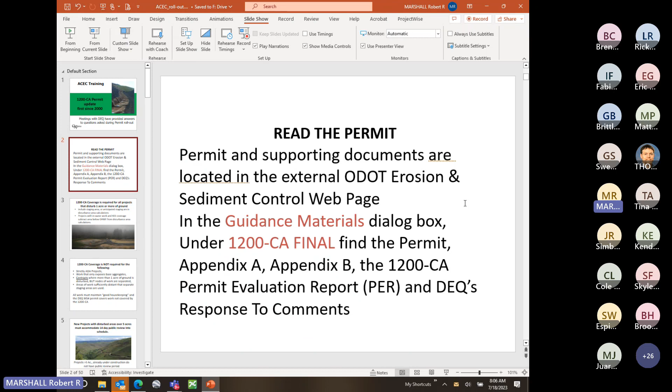The 1200 CA permit evaluation report is a guidance document for DEQ inspectors so that the guidance for inspecting projects will be consistent over time and with different inspectors. This dialog box also includes DEQ's response to comments, as there were many comments and frequently asked questions during the finalization of the permit language. So look on the ODOT Erosion and Sediment Control webpage to find this information and read the permit.

The 1200 CA coverage is required for all projects that disturb 1 acre or more of ground. This includes the staging area or anticipated staging area in the disturbance area calculations. For projects with in-water work that have DEQ's 401 coverage, subtract the area below ordinary high water from the disturbance area calculations for the 1200 CA. Stuff that's covered in the 401 is already covered, so there's no double dipping on the permits there.

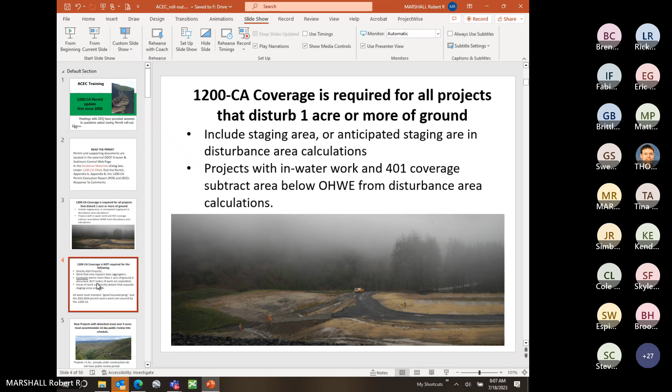The 1200 CA coverage is not required for the following: projects that are strictly ADA projects, so ramp and sidewalk projects that are exclusively ramp and sidewalk projects are excluded. Work that only exposes base aggregate is also excluded. The disturbance that the 1200 CA is concerned with is disturbance of soil, so base aggregate exposure does not trigger the 1200 CA coverage.

Contracts where more than 1 acre of ground is disturbed, but the nodes of work are separated, are also excluded. For example, we might have signage projects that, as an aggregate, have more than 1 acre of ground disturbed, but the 1 acre could be spread over several miles, so each node of work would be less than 1 acre, and that will not require the 1200 CA coverage. Another way of looking at that is if the areas of work are sufficiently distant that separate staging areas are used, that would be an indicator that the 1200 CA is not required.

All work on all our projects must maintain good housekeeping, and DEQ has an MS4 permit that covers work that is not covered by the 1200 CA. So be aware that if the project's not covered by the CA, you still need to work clean and responsibly.

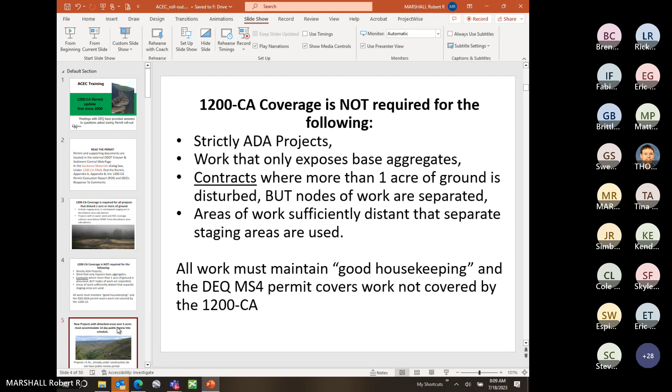New projects with disturbed areas over 5 acres must accommodate a 14-day public review period into the schedule.

Just to let you know, I had this computer plugged into the wrong thing. Hey man, you're on mute. There you go. Humans, what are you going to do?

Anyway, new projects that disturb more than 5 acres must accommodate the 14-day public review period into the schedule. Projects over 5 acres that are already under construction did not have a public review period.

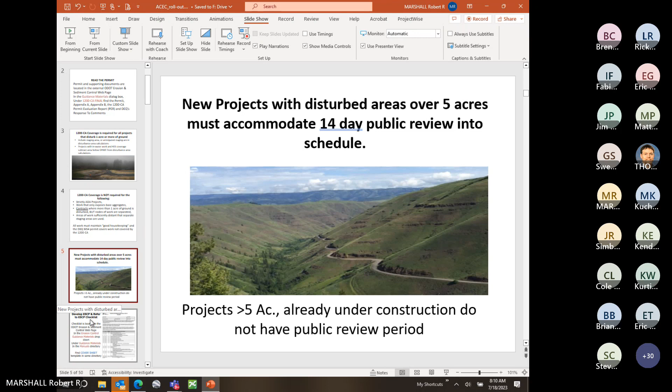We need to develop the ESCP, the Erosion and Sediment Control Plan, that is compliant with the Department of Environmental Quality's requirements. We've updated our erosion and sediment control checklist to help provide guidance in that regard. The checklist is located on the ODOT Erosion and Sediment Control webpage in the Erosion Control Guidance Materials dropdown, and under Guidance Materials in the Manuals directory.

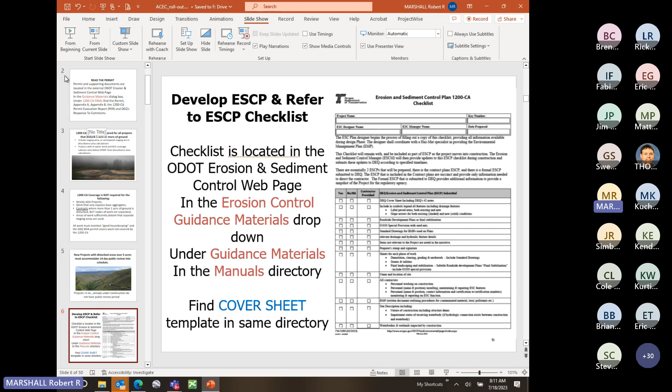You can find the checklist there, and you can also find the cover sheet template in the same directory. The cover sheet is a MicroStation file, and it is built in 3 models for 3 separate sheets.

The first sheet will provide direction for the designer, the erosion and sediment control plan designer, to infill information that should be available during the design process. The second sheet of the cover sheet provides the DEQ required notes. The third sheet provides blank spaces and guidance for the contractor to provide information that would not be known during the design process.

Designers infill the cover sheet to the fullest extent possible. The contractor must supply the remaining information after the bid is awarded.

During design, you can duplicate the project site and vicinity maps, infill the work phase BMP matrix. It's in the upper right-hand corner of the first sheet, and provide the site and project information in a simple narrative. Be aware that ProjectWise has a cover sheet directory, so once the cover sheet is edited, it can be loaded into ProjectWise.

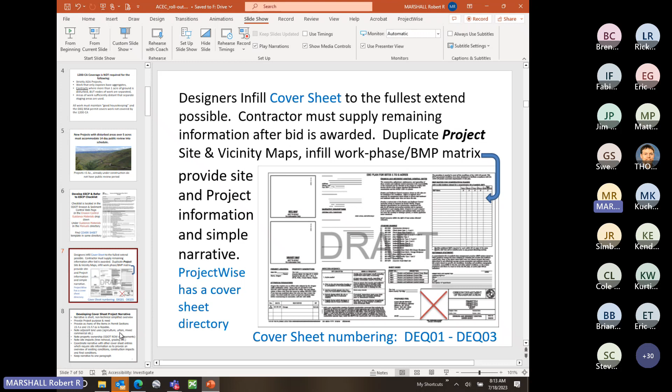In developing the cover sheet narrative, the narrative is a short, non-technical, simplified overview of the project. In the narrative, provide the purpose and need, and provide as many of the items in the permit sections as feasible.

Sections 15.4.e and 15.4.f as feasible. Some of the listed items will not apply to our project.

Note the adjacent land uses—they could be agricultural, rural, urban, or mixed commercial, etc. Note the property ownership; this will usually be on ODOT right-of-way with easements. Note the site impacts, such as tree removal or grading. And coordinate the narrative with other cover sheet entries which require site information.

Provide an overview of the existing conditions, the construction impacts, and the final conditions. Keep the narrative simple and try to keep it to one paragraph.

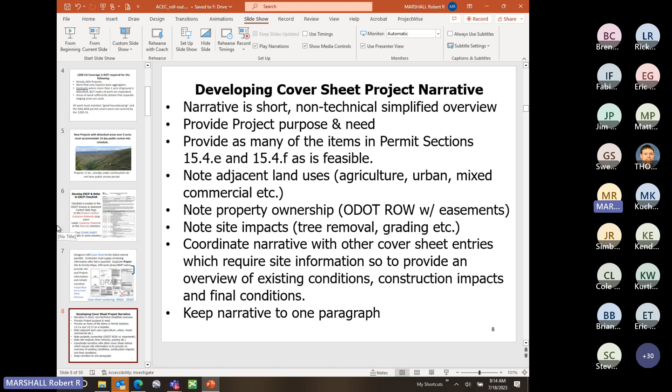Provide in the erosion and sediment control plan submittal, the cover sheet. Cover sheet 3 provides blank lines for the contractor to list potentially polluting materials and activities, and lists water bodies within one mile of the project and their 303 impairment status.

Anticipate the non-stormwater discharge, such as fire hydrant flushing or irrigation system flushing. Note the buffer zones if the project is adjacent to water. If treatment is used to neutralize contaminated materials, get approval from DEQ prior to use of that system.

We will need to provide an EMP if contaminants are known to be on the project site. You need to provide the standard drawings referenced in the plan sheets, the erosion and sediment control plan sheets. Provide the 280 standard specification and the special provision.

And then because DEQ wants to know what the seed mix is for final stabilization, provide the 1030 special provision, so as to provide the seeding.

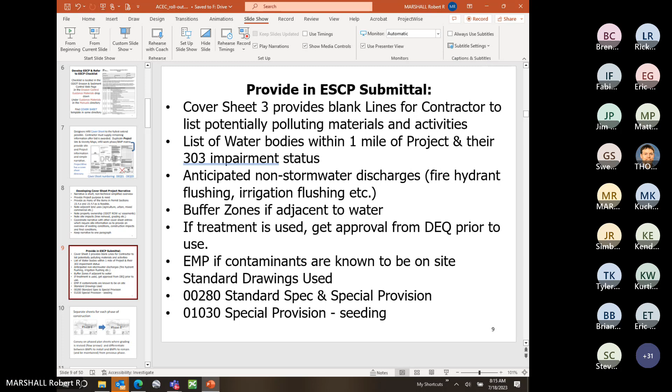The erosion and sediment control plans will now need to be developed to represent each phase of construction. Convey on the phased plan sheets where grading is revised; flow arrows can provide that information.

Differentiate between BMPs to install and BMPs to remain in place from the previous phase. Showing BMPs that remain from the previous phase can be done by shading or graying them out, and not drawing attention to them with the keynotes.

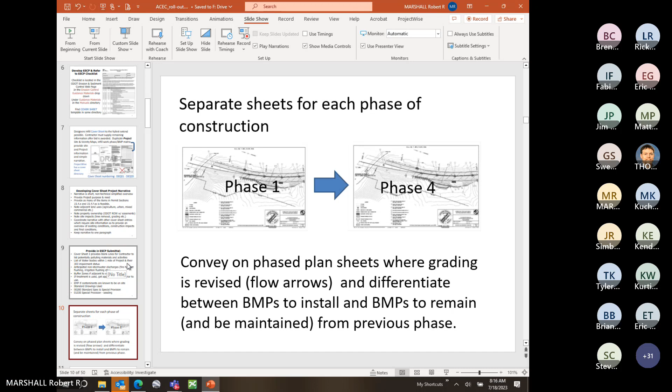So develop the erosion and sediment control plans aligned with DEQ's requirements. Phase plans must have labels identifying the phases of work as described in permit section 15.3.

DEQ's identified phases of work are the following: A is demolition, clearing, grading, and earthwork; B is streets and utilities; C is vertical construction; and D is final landscaping and site stabilization.

DEQ's phases describe land development, not linear construction. ODOT's phases of work follow ground disturbance. So to stay aligned with DEQ's requirements but represent ODOT's phasing of work, some DEQ labels may not apply.

For example, when a DEQ phase does not apply, such as no vertical construction, note that in the narrative. Most ODOT projects combine phases A and B into a phase of demolition, earthwork, and streets and utilities, which may be conducted in different stages as work moves around the project.

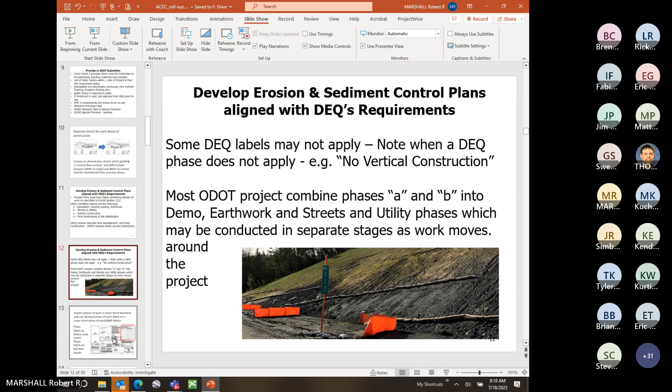So explain the phases of work in the cover sheet narrative and use identical phase of work labels as in the cover sheet phase of work BMP matrix. Phase labels on the matrix must match the phase labels in the erosion and sediment control plan sheets.

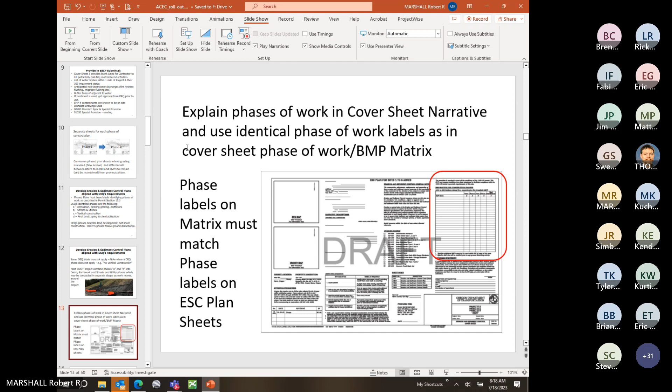Develop the erosion and sediment control plans aligned with DEQ requirements. In the final phase, show seeding, mulching, and all final site stabilization. It's worth recalling that section 280.70 in the specifications requires removal of all temporary BMPs.

But in our final phase plan sheets, for example if we've got straw wattles in the final phase, we are not showing a final phase with all those structural BMPs removed. They will be removed as required by the contract, but it's been directed by the state engineer that we're not developing a special sheet set just for a hatching that represents seeding.

The FA series, which is roadside development, when used—when we've got a planting plan for the project—should have the final stabilization label added and included on the sheet.

Hey, Bob. Hey. There's a question in the chat: can you confirm separate plans are required for the DEQ phases, not the traffic control / construction stages and phases?

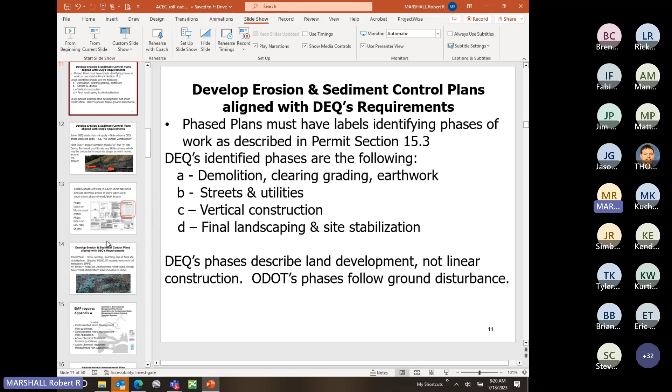So the traffic control plans can provide a reference as to how disturbance is actually moving around the project.

The labels can still correlate with the DEQ labels and may be combined, as I noted, that earthwork and streets and utilities could be combined into one phase, and those phases can follow the phasing of work as identified in the traffic control plans. But the traffic control plans are not gospel as to how the work is moving around on the project site.

So you have to talk with the project leader and just be aware of how the project is sequenced.

Ian, and I appreciate—go ahead. Ian, did that answer your question?

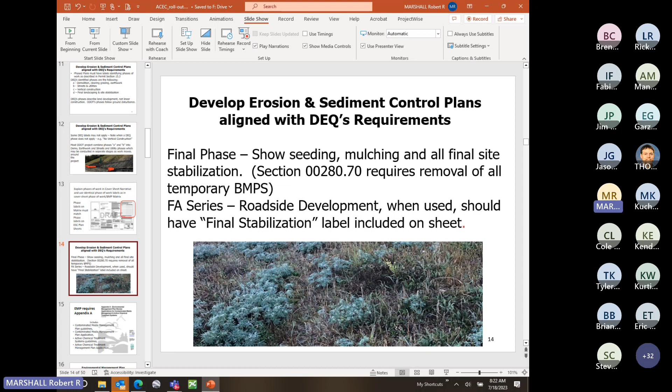So anyway, the final phase could be just the final phase of erosion and sediment control with seeding, or the final phase might be the introduction of the FA series, which is a planting plan to the ESCP. So the environmental...

When contaminants are known to be on site, designers will be working with ODOT hazmat, and ODOT hazmat can identify the type, depth, and location of contaminants on the project site. When contaminants are known or found during construction, the contractor is responsible for developing the environmental management plan, the method for treatment, or location of the approved disposal site. These are means and methods owned by the contractor. All work associated with contaminated materials shall comply with Section 290, and work must immediately stop in locations of found contaminants.

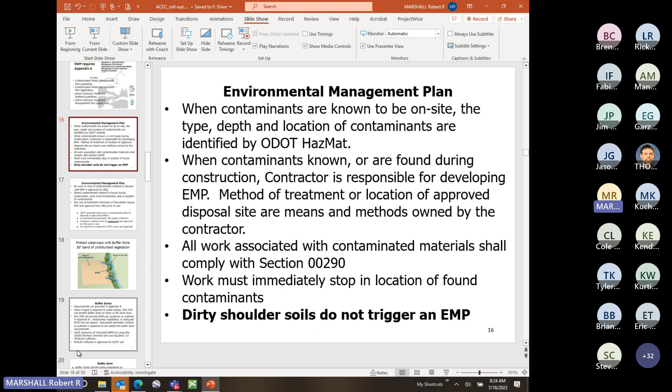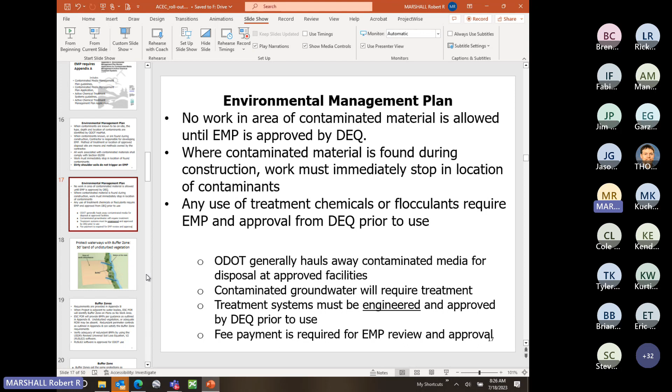ODOT generally hauls away contaminated media for disposal at approved facilities. Contaminated groundwater will require treatment. Treatment systems must be engineered and approved by DEQ prior to use, and there is a fee payment required for the EMP review and approval. Be aware that the fee payment also includes a payment service fee, so that's going to be about $970 for an EMP approval, and that is paid through the YDO electronic portal.

Another new requirement is that buffer zones are now required where work is adjacent to waters of the state. The buffer zone is required to be 50 feet, and where 50 feet of undisturbed vegetation is not available, there is guidance in Appendix B, which provides guidance as to BMPs that can be used to provide equivalent protection as a buffer zone. Again, requirements are provided in Appendix B.

When a project is adjacent to water bodies, the erosion and sediment control professional of record will identify that buffer zone on plans as a no-work area. The ESC professional of record will provide BMPs per guidance as outlined in Appendix B. Undisturbed vegetation or adequate right-of-way may be absent in this buffer zone. Redundant perimeter controls as outlined in Appendix B can satisfy the buffer zone requirements.

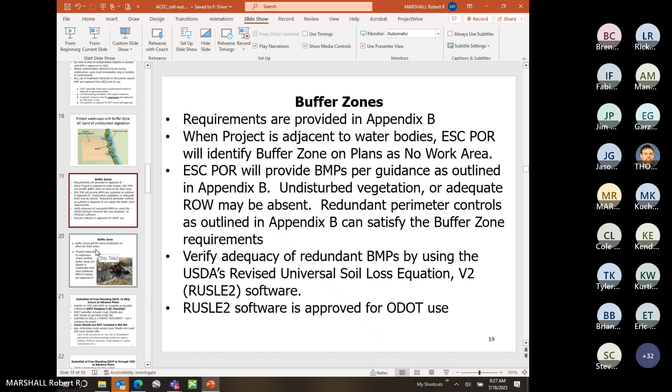DEQ wants us to verify the adequacy of the redundant BMPs by using the USDA's Revised Universal Soil Loss Equation version 2 software, that's the RUSLE2 software. The RUSLE2 software is approved and vetted by ODOT for use. So buffer zones get the same protection as other no-work areas, and projects adjacent to waterways where existing buffer zones are absent or inadequate shall have additional BMPs in the design per Appendix B.

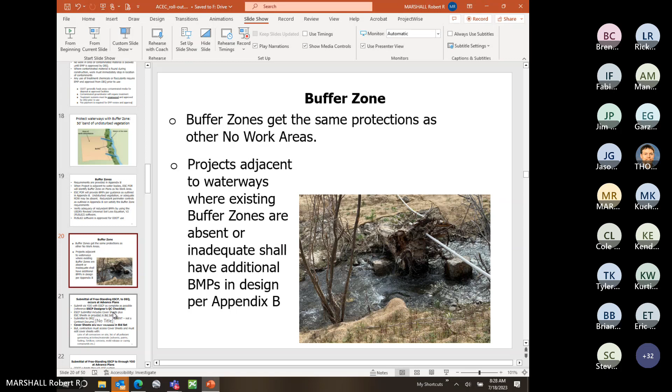Submittal of the freestanding erosion and sediment control plan to DEQ occurs at advanced plans. This submittal will occur via YDO, that's DEQ's Your DEQ Online electronic portal. So submit via YDO with the erosion and sediment control plan as complete as possible, and after using the ESCP designer's quality control checklist. The erosion and sediment control plan submittal to DEQ includes the cover sheets plus the erosion and sediment control sheets as provided in the bid set.

Submittal to DEQ is a permit document, not a contract document. Cover sheets are not included in the bid set, but contractors must be able to access the cover sheet and must edit the cover sheet with the list of all contractors on site, the list of all pollutant generating activities and materials, such as paint, solvents, fuel, fertilizer, concrete, mold release, or curing compounds, etc.

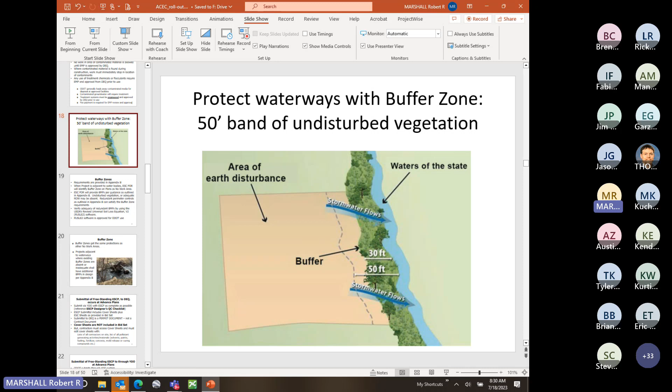Back to submitting the freestanding ESCP. This goes through YDO and advanced plans. ODOT will submit this through the YDO system. Contractors and design consultants should sign up to the YDO as consultants, approved by an ODOT RO, so ODOT needs to bless the consultants in the YDO system. YDO consultants can access documents in the system, but not submit to the system. Submittal to the system infers a signature as an ODOT representative.

Only YDO responsible officials, those would be ROs, can submit documents. Professionals of record, RECs, regional environmental coordinators, and resident engineers and environmental discipline leaders should sign on to YDO as ROs. Those would all be ODOT positions. ROs can be responsible officials for multiple projects.

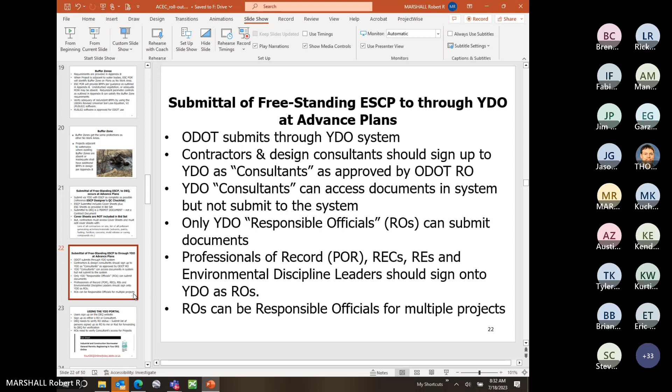When using the YDO portal, users sign in on the DEQ website, either as an RO or a consultant. DEQ needs to verify the RO status, so ODOT needs to submit a list of persons signed up as RO to me or Rod for forwarding. Then ROs need to verify consultant access for projects.

At the bottom of this page, I grabbed a snippet of the DEQ website, and you can see the DEQ YDO online web address. Go on there—there is a tutorial, a video you can look at to become acquainted with the YDO portal.

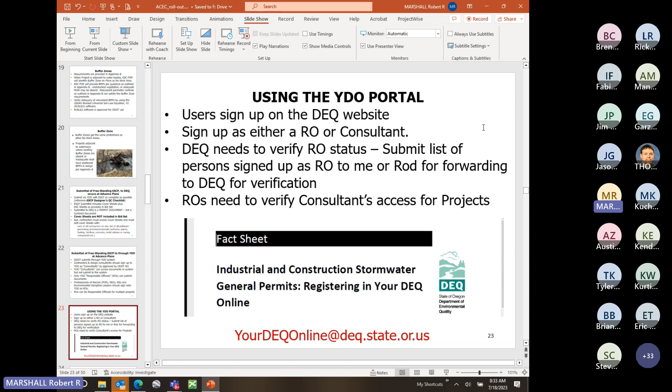In using the YDO portal, responsible officials start a new submittal from the left side of the dashboard. There needs to be a naming convention with the first word as ODOT, then the project name as provided in the project title block. When you're using the YDO and downloading stuff, that's a simple drag and drop.

The required submittals for the erosion and sediment control plan to DEQ are the initial ESCP, the environmental management plan when contaminants are known or found on site, revisions of the ESCP, and corrective action reports. Monitoring reports are not a required submittal unless asked for. On a project site, it's important to have the monitoring reports available and in chronological order for DEQ when asked.

The 14-day public review period: ODOT submits to DEQ at advanced plans. The 14-day review period begins on the day that DEQ posts the project for review, not on the day ODOT submits the project to DEQ. DEQ says there may be a few days between the submittal and posting.

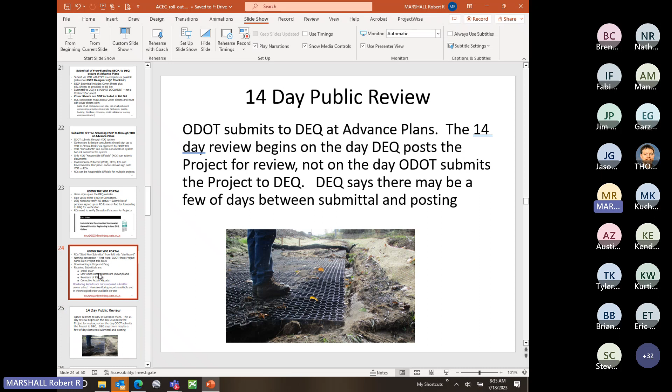I want to go back for a second. Be aware that the initial submittal of the ESCP is to start the DEQ project file for this project. ODOT's 1200-CA permit is in good standing and in hand, and the initial submittal of the ESCP to DEQ is not required to initiate construction. So we've got the permit in hand and construction can start, and that's not dependent on this initial submittal of the ESCP.

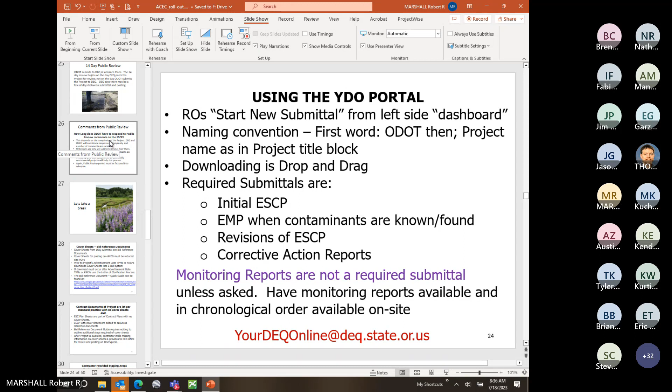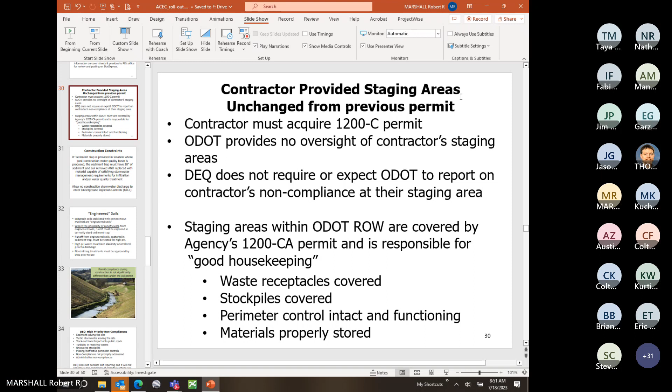Tina asked, does the first page of the erosion and sediment control plan include a legend, the standard drawing list, general notes, even though the cover sheet has that information? And that is yes. And then Brookley asks, even if a contractor's staging area is on private property and the contractor has a 1200C permit for that staging area, is it true that the staging area still needs to be counted when calculating the total project area of disturbance? And yes, it continues to be a requirement that DEQ has imposed.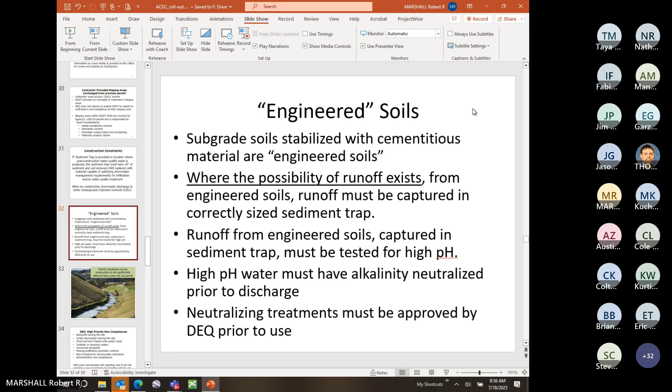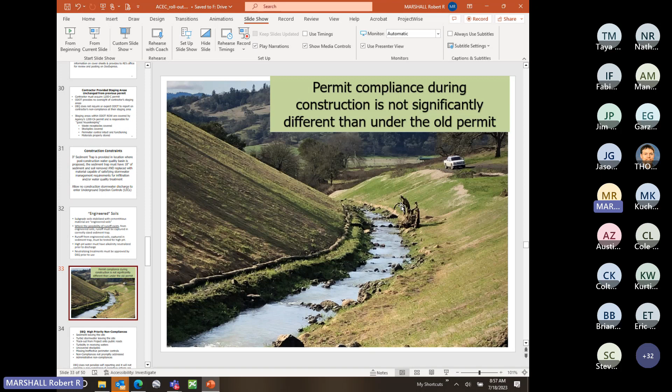Permit compliance during construction is not significantly different than it has been under the old permit. So if best practices are followed and BMPs are installed correctly and BMPs on the plans are all installed, it should not be a problem complying with the permit. So we can do this. I know that the new requirements on paper look daunting, but we can do this.

DEQ's high priority non-compliances are sediment leaving the project site, turbid stormwater leaving the site, track out from the project onto public roads, turbidity in receiving water, uncovered stockpiles, missing or ineffective perimeter controls, non-compliance not promptly addressed, and administrative non-compliance.

The missing or ineffective controls regards BMPs that are shown on the plan and not installed in the field. So it's important that BMPs that are shown on the plans be installed and installed properly. And then administrative non-compliances are always a concern. DEQ will not penalize self-reporting, and it will not penalize a non-compliance if corrective actions are prompt and thorough.

A request for clarification about the acronyms being used. Okay, a BMP is a best management practice. That would be any structural erosion and sediment control feature. For example, straw wattles, compost socks, inlet protection, and matting are all best management practices.

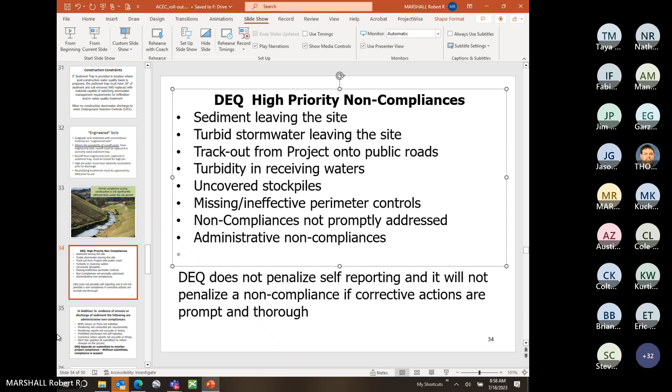In addition to evidence of erosion or discharge of sediment, the following are administrative non-compliances. BMPs shown on the plans are not installed. Monitoring not conducted per requirements. Monitoring reports not accurate or timely. Prohibited discharges not self-reported. Corrective action reports not accurate or timely. The erosion and sediment control plan not updated and submitted to reflect changes on the ground.

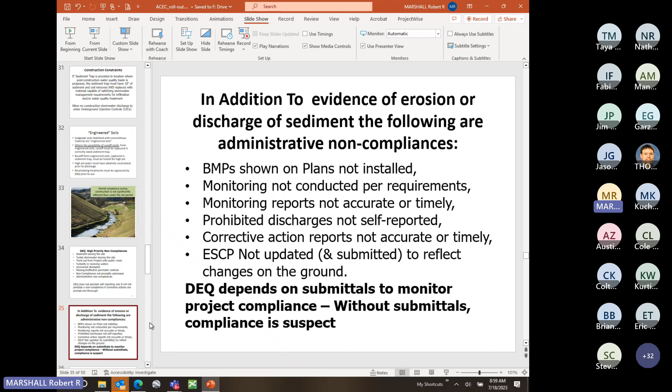DEQ depends on submittals to monitor project compliance. Without submittals, our compliance is suspect. So in addition to having features on the ground as they should be, all the paperwork also needs to be as it should be. So it is important to revise the erosion and sediment control plan to keep it representative of the site conditions, including when construction plans change, when site conditions change, or when BMPs change.

The erosion and sediment control manager provides the erosion and sediment control plan revisions to ODOT within 7 days of the field change for submittal to DEQ. The agency submits to DEQ within 30.

I took a picture of the... Hey, Taya. You're not on mute. Thank you. There you go. Humans.

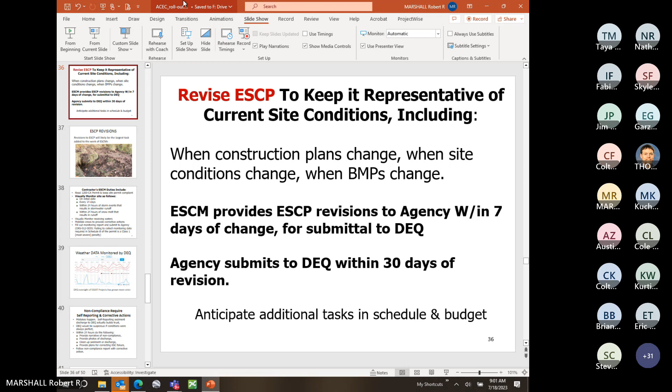So the ESCM provides the ESCP revisions to ODOT within 7 days of the field change for submittal to DEQ. Then ODOT submits to DEQ through the YDO portal within 30 days of the field revision. So anticipate additional tasks in the schedule and budget. ESCP revisions will likely be the largest task added to the work of ESCMs.

So during design and establishing the project cost estimate, consider that the ESCMs will have additional tasks that will add to the budget. These should be accounted for.

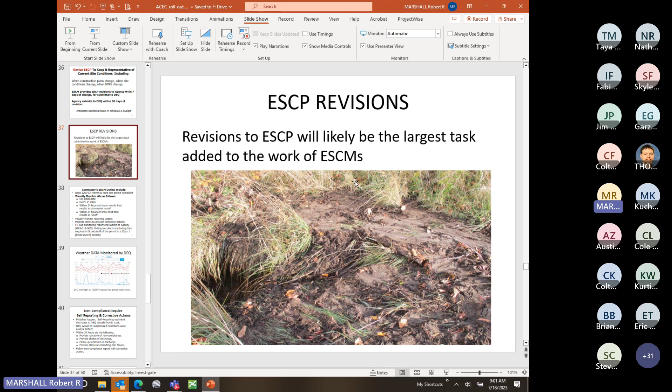The contractor's ESCM duties will include to read the 1200-CA permit and keep the project site permit compliant, to visually monitor the site as follows: on the initial date, every 14 days, within 24 hours of storm events that result in stormwater runoff, and within 24 hours of snow melt that results in runoff.

They need to visually monitor receiving waters, to mobilize crews to provide corrective actions, and to fill out the monitoring report and submit that to the agency. ORS 012-0055 is a statute that reads failing to collect monitoring data is a Class 1 penalty. So that is a severe penalty if the monitoring is not provided as required.

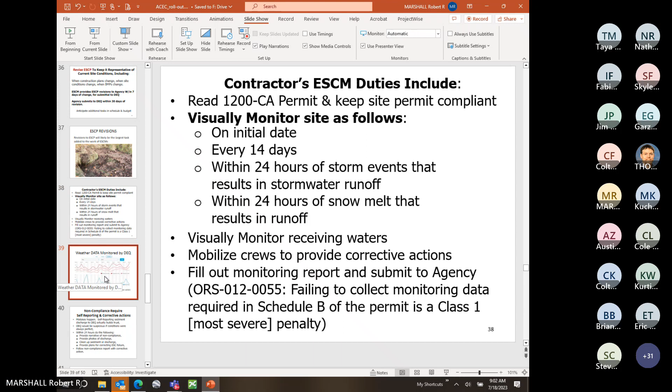As I noted, the monitoring reports are not a required submittal, but DEQ can ask for them at any time. And when asked and provided those monitoring reports, DEQ can kind of desk monitor whether they are accurately representing rainfall events. So again, accurate monitoring reports are important because DEQ can be looking over our shoulders.

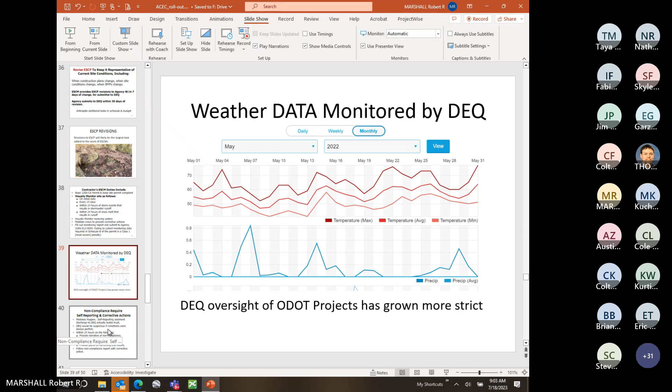Non-compliance requires self-reporting and corrective actions. Mistakes happen. Self-reporting a sediment discharge to DEQ will actually build trust. DEQ would be suspicious if conditions were always perfect.

So within 24 hours of a non-compliance, the following must be provided. Provide a narrative of the non-compliance, provide photos of the discharge, clean up the sediment or the discharge, and provide plans for correcting the erosion and sediment control failure. Follow the non-compliance report with corrective action.

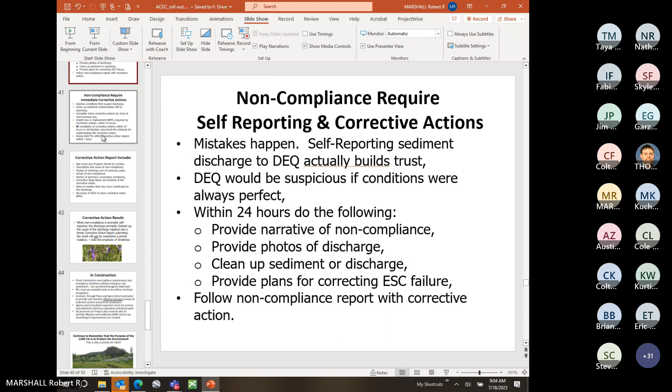Non-compliance requires immediate corrective actions. Address the conditions that caused the discharge, clean up the sediment left by the discharge, complete minor corrective actions by the close of the next business day. Install new or replacement BMPs required by the corrective actions within 24 hours.

If completion of corrective actions within 24 hours is not feasible, document and schedule for implementation the corrective actions, and then revise the ESCP to reflect corrective action repairs within 7 days. I know that a lot of the attendees to this presentation are design consultants, but we also have consultant inspectors. So these non-compliance issues that occur during construction are still relevant to this audience.

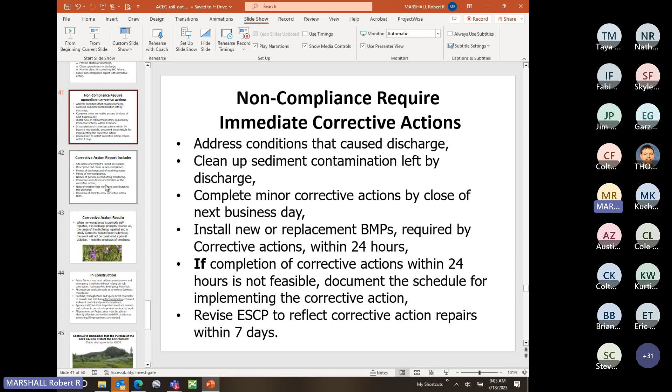The corrective action report includes the site name and the project's permit ID number, the description and the cause of the non-compliance, photos of the discharge and of receiving water, period of the non-compliance, the names of the persons conducting the monitoring, the corrective steps taken and the timeline of the corrective action, the note of the weather that may have contributed to the discharge, and revisions of the ESCP to show the corrective action BMPs.

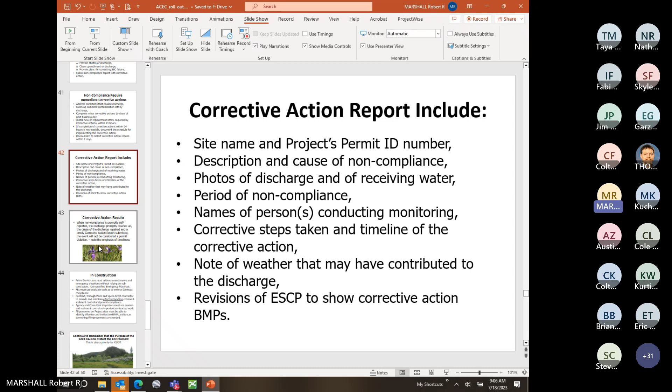So when a non-compliance is promptly self-reported, the discharge promptly cleaned up, the cause of the discharge repaired in a timely corrective action and a timely corrective action report submitted, the event will not be considered a permit violation. Note the emphasis on timeliness.

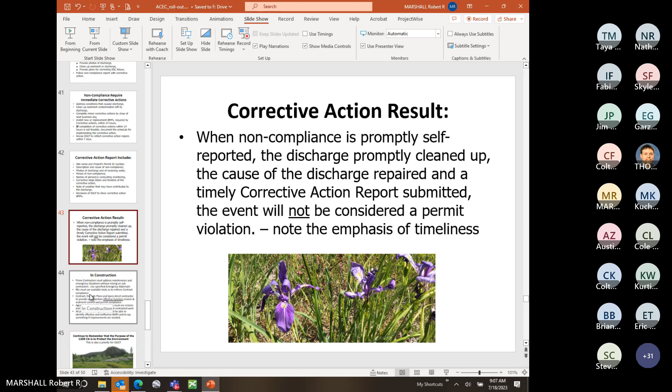So in construction, the prime contractors must address maintenance and emergency situations without relying on subcontractors. It is important that designers provide in the special provisions adequate emergency materials, and it is equally important that during construction the prime contractors use those emergency materials. I think it's relevant for this audience that the nature of emergency materials be identified, that these are products that could be stored on the project site and be readily deployed.

So something like a compost sock that needs to be field fabricated would require the mobilization and delivery of bulk materials, whereas compost socks that are pre-filled and on a pallet could be immediately deployed without mobilization of special equipment. So in design, make sure that you're specifying emergency materials that the prime contractor can quickly install.

Resident engineers must use available tools to enforce the contract compliance. Contract plans and specs direct the contractor to provide and maintain effective function of erosion and sediment control and permit compliance. Agency and consultant inspectors must see erosion and sediment control as important contracted work. This is work that's contracted and being paid for, so it's important that it is done. And all personnel on project sites must be able to identify effective and ineffective BMPs and to say something if improvements in the effective function are needed.

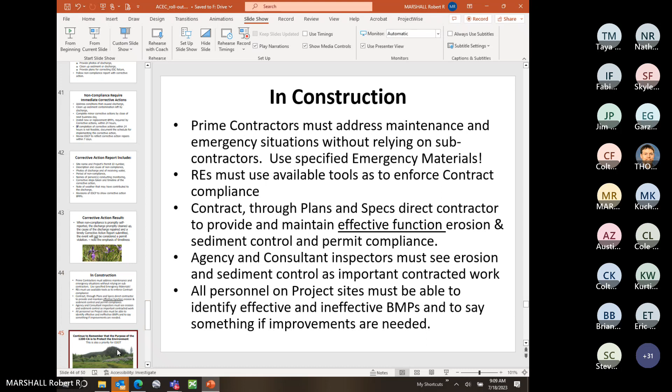Continue to remember that the purpose of the 1200 CA is to protect the environment. This is a priority for ODOT and for really everybody in this presentation. So the permit is a good thing. It's kind of a difficult pill to swallow sometimes, but compliance with it is important and supports ODOT's values.

The permit requires additional tasks. The erosion and sediment control manager has more duties. The threshold for monitoring after rainfall has changed. Stricter oversight of concrete wash and alkalinity in stormwater runoff is now in play. The environmental management plans are a new requirement. Sheets for each phase of construction are new requirements. Buffer zones are new requirements, and the DEQ YDO electronic portal required for new submittals is a new requirement.

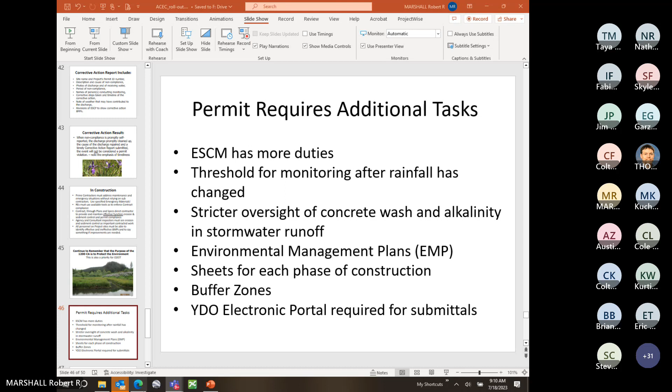So ODOT's processes have changed. We have provided multiple edits to the 280 specifications. The consultant scope template has been revised. There have been revisions to the ODOT erosion and sediment control manual. Trainings for designers and construction staff have been provided. Scoping work for additional tasks in design and construction are revised. DEQ requirements require the use of the YDO web portal. Drafting standards have adopted this new content, and a contract change order template, a CCO template for permit-driven contract changes, is now available.

And thanks, Rod, for identifying ESCM. That's, yes.

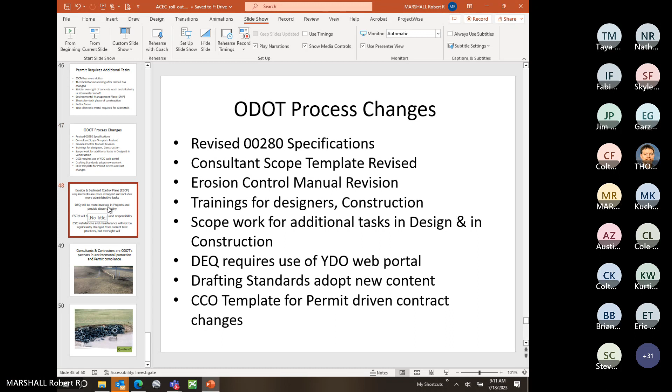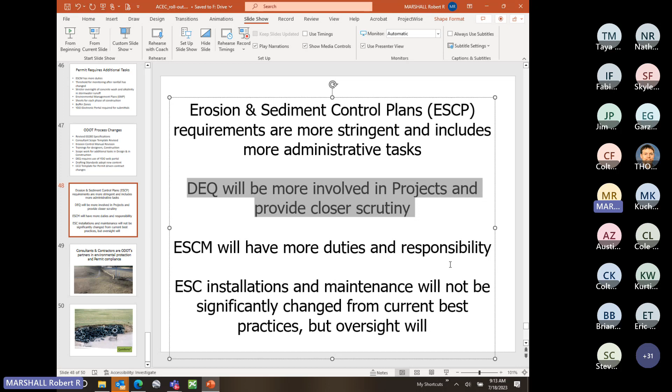The erosion and sediment control plan requirements are more stringent and include more administrative tasks. DEQ will be more involved in projects and provide closer scrutiny. The ESCM, the Erosion and Sediment Control Manager, will have more duties and responsibilities. The erosion and sediment control installation and maintenance will not be significantly changed from current best practices, but oversight will. It's worth noting that DEQ knows that over the last 20 years they have essentially slacked off in their oversight of erosion and sediment control, and in doing so they have trained contractors that nobody's looking. Well, now DEQ is looking, and we can expect random, unannounced visits to our project sites. So just something to be aware of.

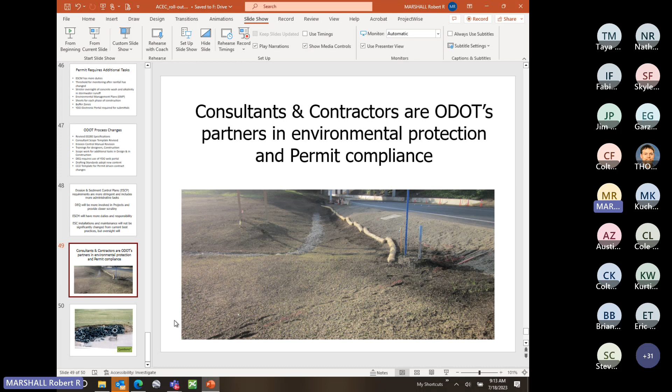Consultants and contractors are ODOT's partners in environmental protection and permit compliance. So we are all on the same team in this.